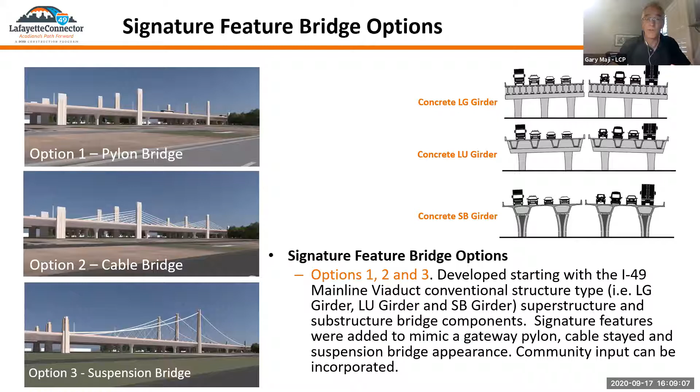All of these 3 options, the pylon, the cable, and the suspension bridge, all can incorporate the mainline viaduct structure types that we talked about in Design Workshop 1. And that's important, so you're aware of that. And of course, we talked a little bit more about really true signature bridges, and that was the arch structures, the single arch and the double arch.

The main difference is that these structural elements actually support the bridge and the loads upon it. But they also have the advantage of providing more open space underneath the structure, with more of a span between the piers in this particular location. That's one key difference among many.

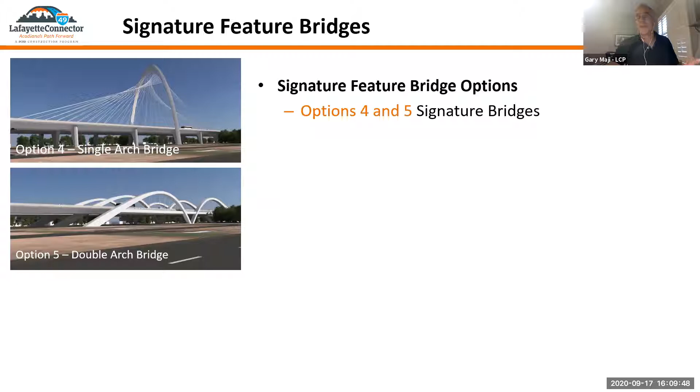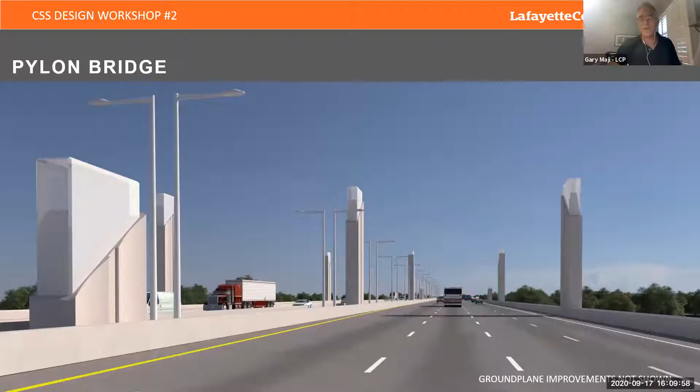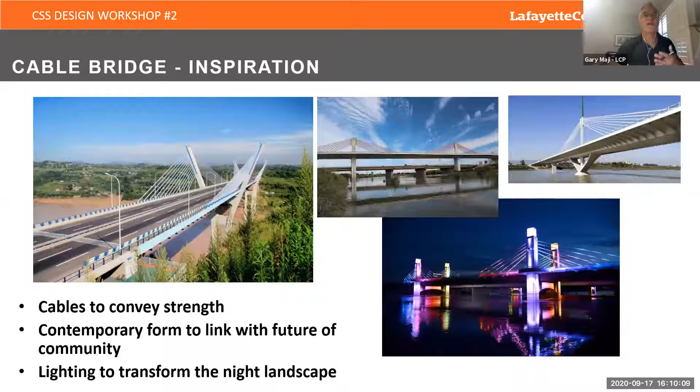Bradley talked about the inspiration associated with the pylon bridges. He went through the examples, and I'm going to fly through these since I know you've seen them, but we'd be happy to go over them in more detail. Then he talked about the inspiration for the cable bridge, and shared his ideas and thoughts about the suspension structure.

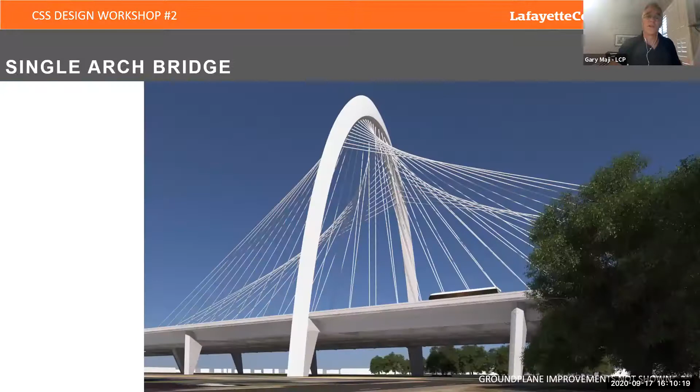Eric shared a little more about the single arch and the advantages it brings, and what really drove him to develop this design. And likewise, we talked about the double arch.

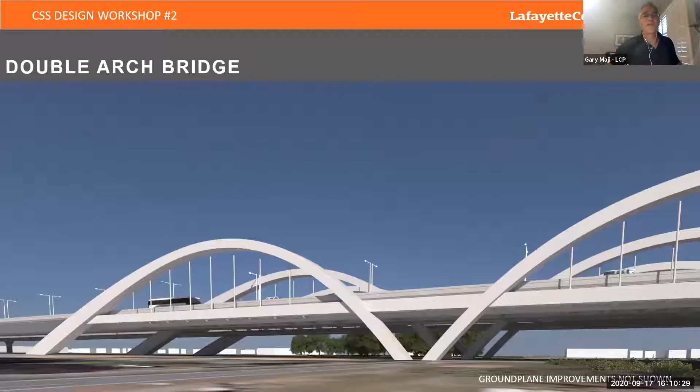When we got to the point of introducing the structures, we talked about how we evaluated them—by cost, maintenance of traffic, inspection, and aesthetics. Aesthetics, particularly for signature feature bridges, is a huge criteria. But so is cost, and we think about construction costs.

We need to share that funding has not been identified for the construction of the corridor viaduct, but this funding will likely come from a combination of local, state, and federal funds.

You heard us talk about premium costs. So what are premium costs? Premium costs are really the additional costs to construct that signature feature bridge if it were to be built along the mainline viaduct.

That's huge, because the state is on board to support the construction of a mainline viaduct with 150-foot spans and 22-foot vertical clearances as part of the route requirements. If there were to be a signature feature bridge within that mainline viaduct, that premium cost would be the additional cost to construct that structure.

In a way, it's kind of like a savings, because you're not paying for everything—there are already some costs built into this project. That premium cost will likely have to come from local or other sources, at least at this point, and the state and Tim would like to talk to you more about that if you have questions.

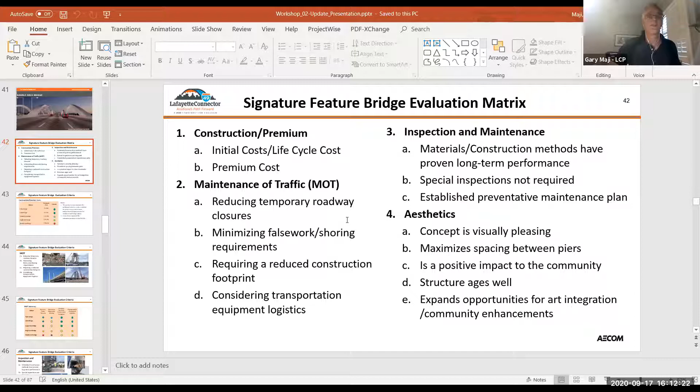So, anyway, we're getting close to the end of our little recap.

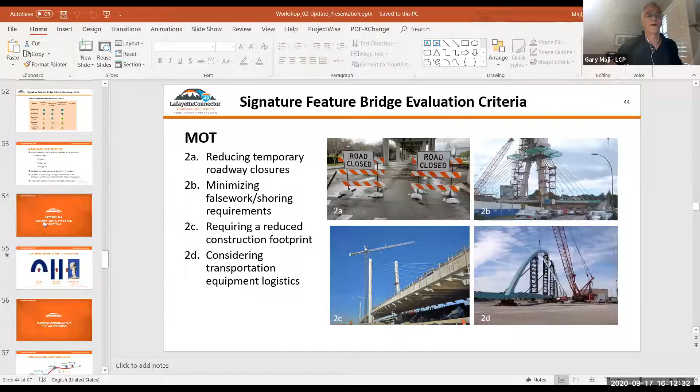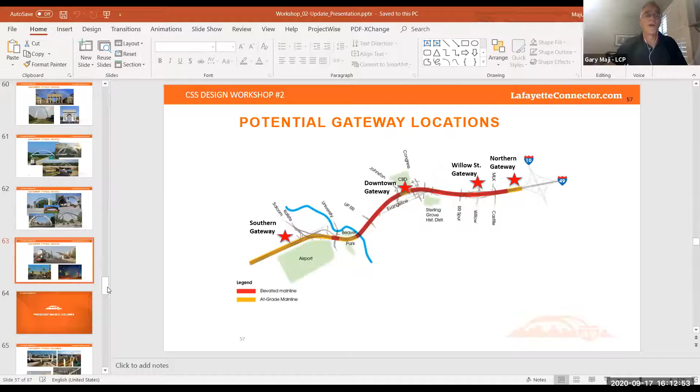I'm going to go quickly through what Jeff shared about the gateway elements, how there are different types of gateway elements, and where they can be located. Just like the signature bridges, we identified possible locations for the gateway elements. As you saw, gateway elements can be arches, columns, monuments—really whatever we feel fits into the corridor.

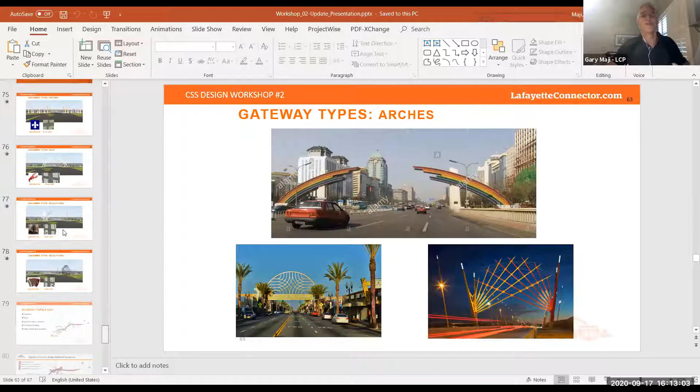That's what we shared with regards to the function and type, as well as examples and options along that. Lastly, we shared a little about the signature feature bridges at locations—basically the locations I had identified.